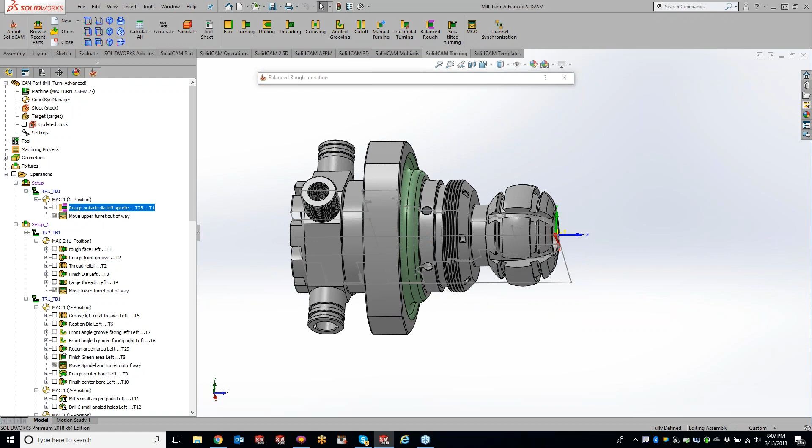So we started off with, let me get my part rotated around here, with our balance roughing. That's going to be your upper turret and our lower turret machining at the exact same time. The lower turret is going to be going a little bit behind the upper turret. So if I just show you my geometry, all I did is chain my outer perimeter. I want to machine it up to where, let's call it, the cam lobes are. Let me fit this here for you, get this back up on top. So going all the way through, up to this cam lobe right here.

And we got our main tool as tool number 25, which is in the spindle. We got our slave tool, which is our lower turret. Level same as usual. Technology, like I said, we're going to be trailing 5 millimeters behind and just doing a roughing strategy, leaving 0.15 millimeters on there.

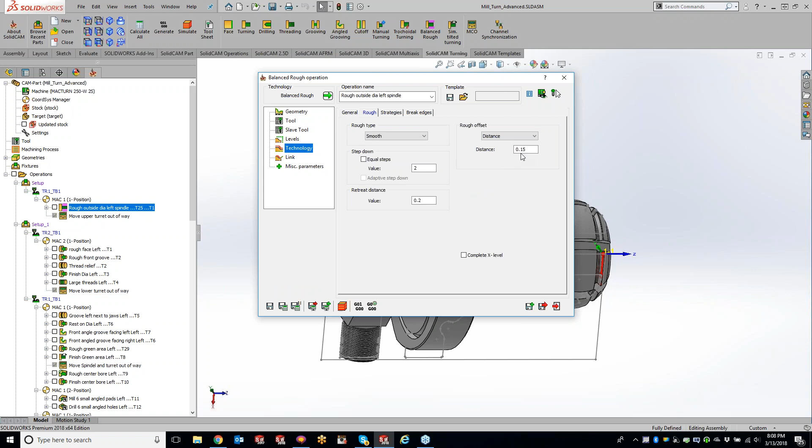So let's just do a simulate real quick. And we'll do a turning. Get this part kind of zoomed up for you guys.

Kev, just real simple to pick stock too. I'm thinking you started with a round piece of stock. Yep, absolutely, I kind of skipped over that part. Great point there, Steve. So we just started off with a simple round stock for starting off this part. Pulled off a bar of round stock that's a little bit larger than what we have. We can kind of see our round stock. And like I've said before, your blue area right here is your stock, and your orange is your actual SolidWorks model itself.

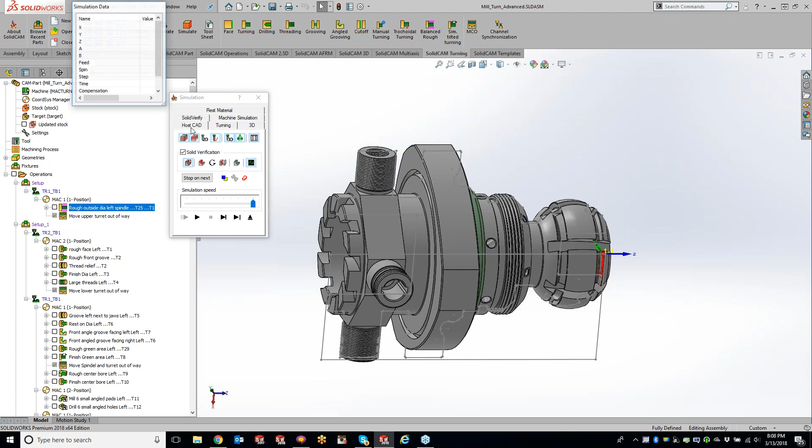Now, if we go into HostCAD, we can kind of see it too if we do the SolidVerify. And we can also go over to SolidVerify, and we're going to see the exact same thing. So this stock was defined kind of like what I've gone through in the past with the stock over here.

Okay, so now, and I'm really sorry guys, I don't have a machine setup or a machine sim for this particular part here. I would love to show it, but I was trying to get Florent to pass it over, but didn't have one quite ready for us.

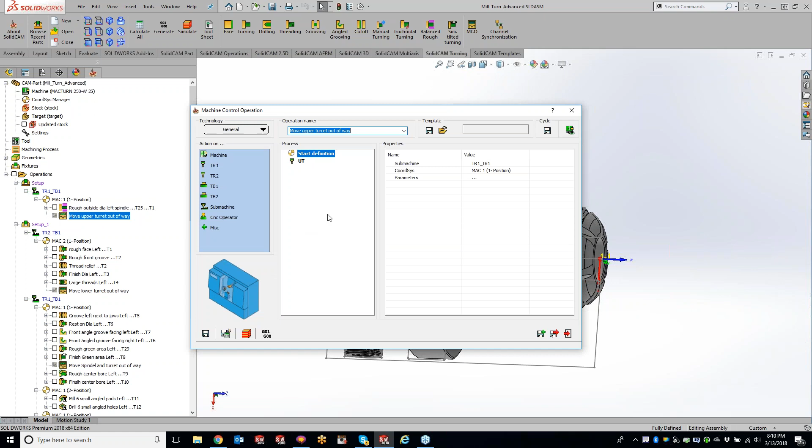So what we're actually doing here now is we're going to move the upper turret out of the way. We talked about this last week using the MCO. So what's happening is I want to move that upper turret out of the way so I can come in here and start roughing off using my lower turret. If I don't tell it to, for this specific machine, to go to the home position, that tool is just going to kind of hang down here, and I don't want that tool sitting in the way. So what the post team did is create a upper turret movement.

So if I click on upper turret, I'm telling it to move, and it's going to move out of the way for us. Like I said, if you guys do need something like this, don't feel like you have to create this yourself. There's a lot in the MCO, and that's why I didn't cover it, just because it's really based off of the post processor more than anything.

Contact your post guy that's been working on your post, or for those of you here in the US who don't know who your post guy is, contact Eric Middleby, and he will get you pointed in the correct direction to get that MCO set up. So don't feel like you have to create that on your own. We're here to hold your hand along the way for that portion of it.

All right, so what I'm going to do is rough off my face here. Now, as you guys will see, I went through and renamed all this stuff. So some of this may not make a whole lot of sense to you, but now when I come back through it, it's easy for me to understand.

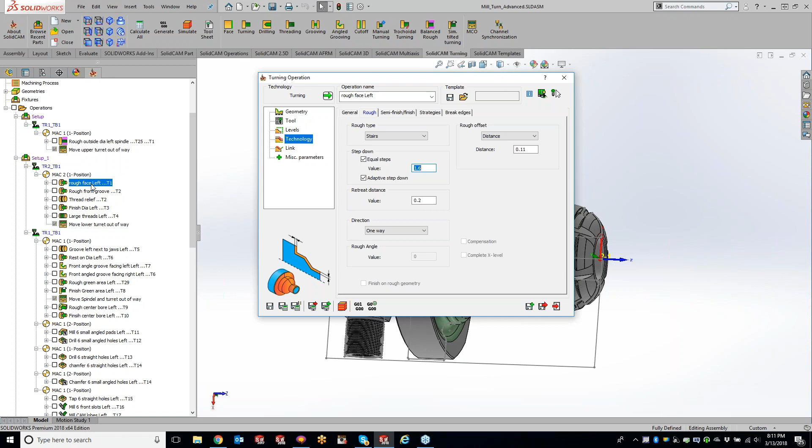So what I'm doing here is roughing the face using the left spindle. This is something that I kind of always overlook, and it does come up every once in a while. And granted, we can come in here and hit the checkbox and kind of see what's going on. But to be able to graze through this stuff without having to turn on all your tool paths is a little bit cumbersome.

So if you guys do put this naming convention in here, it will definitely help you out. You can do that by just hitting F2. If you click on the operation, F2, it will rename it and you can type it in there, or in the actual operation itself you can name it right up here. As soon as you hit save and calculate, it will update for you guys.

Okay, I'm rambling on here. No, it's a really good best practice, Kevin, you know. Yeah.

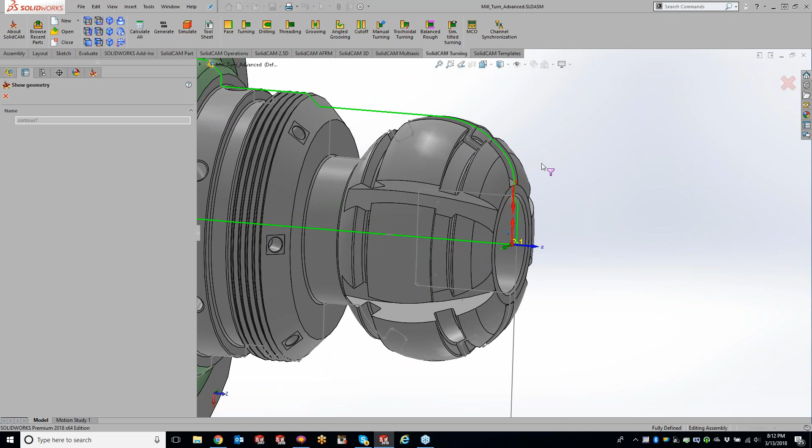Okay, so now I just want to face off, kind of rough it out. So if I come in here, I just grab that tiny smallest little line right there, and I did the auto extend to stock using my lower turret here. Got my tool set up.

Technologies, just doing a roughing strategy, leaving 0.11 millimeters on there and not doing any finish pass. So if we go ahead and simulate this here.

And like I've said before, when you guys are doing turning, try to stay with the turning one here. I find it the easiest to use, and you can really see what's going on, especially since we have our stock showing there for you guys.

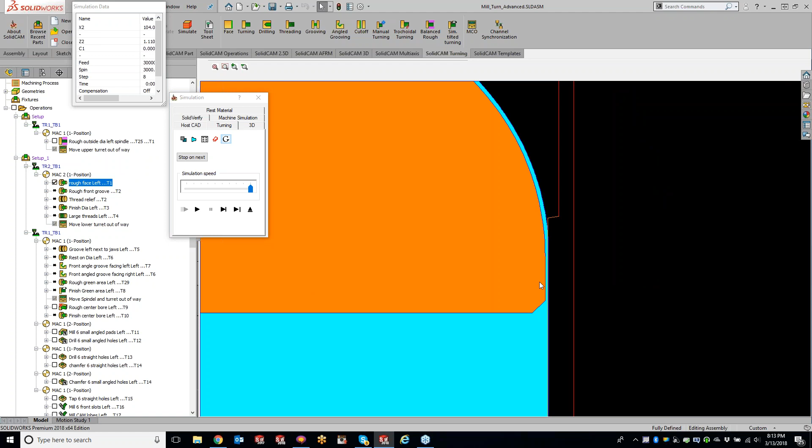Okay, so you can see, roughed it out. If I zoom in really far here, you can still see I have a little bit of material still on there. So I'm just kind of facing off the end of that part as a roughing strategy.

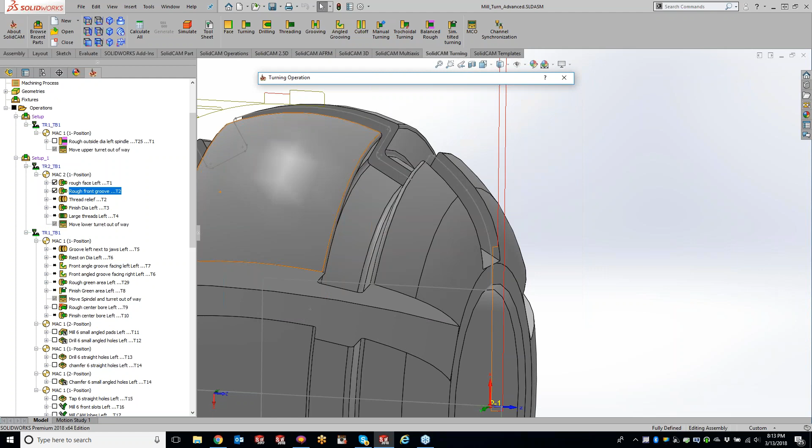Okay, so this one I'm going to rough out the front groove, and as soon as I calculate here, right here I want to groove out this, chunk it out, and just rough it out, and then I'll come back with a finishing tool here.

So if I show you the geometry, you can kind of see the purple line right there, just coming in there and roughing this strategy out here. And like I've talked before, the green line that you guys are currently seeing is our updated stock. That's why when I change something up here with my rough face, a couple operations that are affected by that got out of sync.

That's only because something changed, and that updated stock just needs to be updated. You guys can have this set up to be automatically done, so you wouldn't even see it. It would automatically do it. I like to see kind of what things change.

Like I said, the machinists, we like our control. On the fly, right, Kevin?

Yep, absolutely. So we're just doing a standard roughing operation right here, leaving 0.12 millimeters on there. Like I said, no finishing. Let's go ahead and take a peek here.

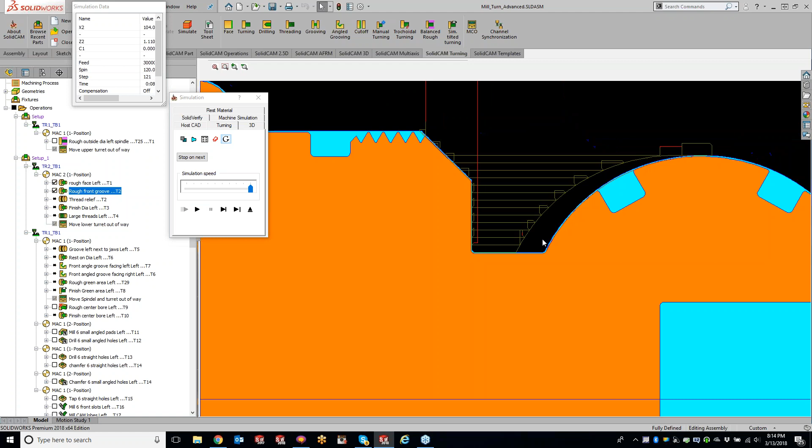Zoomed in, doing a zigzag pattern, and we've still got material. So if I zoom in, we'll be able to see we still have material going all the way around for us. And so what we'll do is come back with a finishing insert and clean up the entire thing.

Let me just calculate all these so we're not out of sync here. Calculate real quick.

And then, Kevin, how do you decide when you go to a grooving tool versus using descending motion? Is there any kind of thought process there? Anything deep, we can really hog out a lot with a grooving tool. Putting that straight down pressure in the x-axis, we can really get a lot of material removed out of there really quick. Okay. It's kind of like drilling versus using an end mill. Drilling is always faster to get material versus using an end mill with circular interpolation.

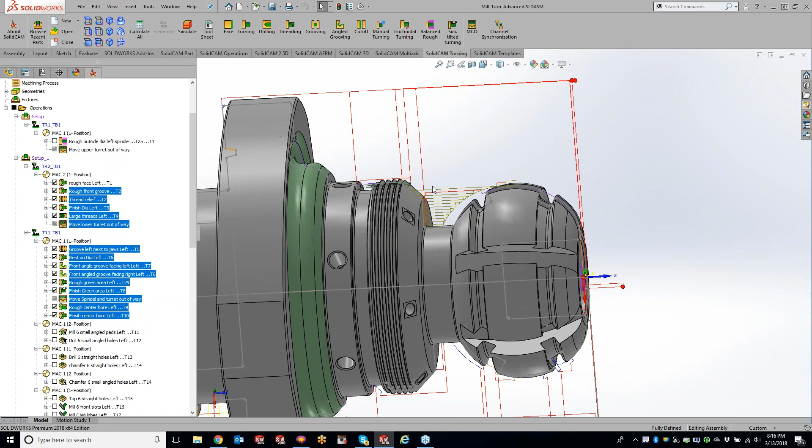Kind of the same strategy here. So I just want to get that bulk of the material out of there, anytime you're going deeper or have a lot of material. Gotcha. Exactly. All right. So, kind of a little off subject here, but after doing that calculation, I have it set up in my settings so it automatically shows the toolpath. Instead of going through and having to uncheck all these, if you just click the operation checkbox right here, they'll all automatically uncheck for you.

Okay. So now we're going to be doing the relief cut after the threads, which is that surface right there. This thread relief that I have set up here is just doing a simple single line going down. Go to our tool, and basically this is getting the rest material out of there. So we got our grooving tool again, same tool we used in the previous operation. Technology, here's the mode I want to go to, tool side right, just doing a single step down, and I can't remember, nope, I am finishing this one off.

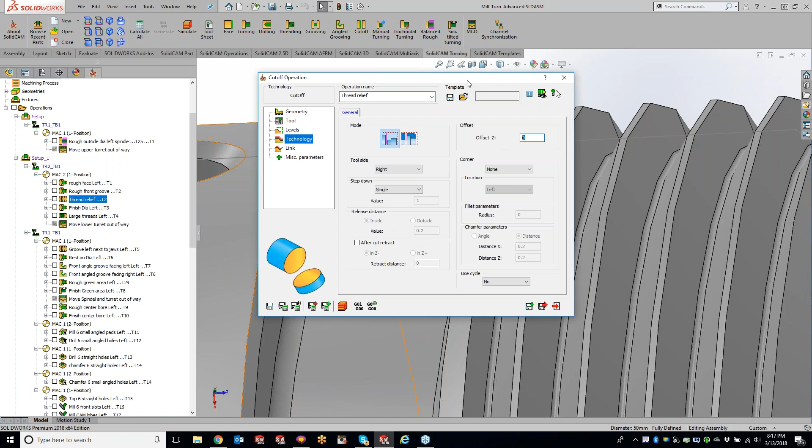So I don't have anything put in my offset. So when I come back with that finishing tool, this will already be finished off. So if we just do a simulate real quick. And I apologize if I feel like I'm rushing through this. Oh, no, I'm sorry, we're just cleaning up that backside is what's going on there. The way our finishing tool is angled, it won't be able to hit that wall, and I'll show you that here. Like I said, I apologize for going through this a little fast, but there's a lot in here.

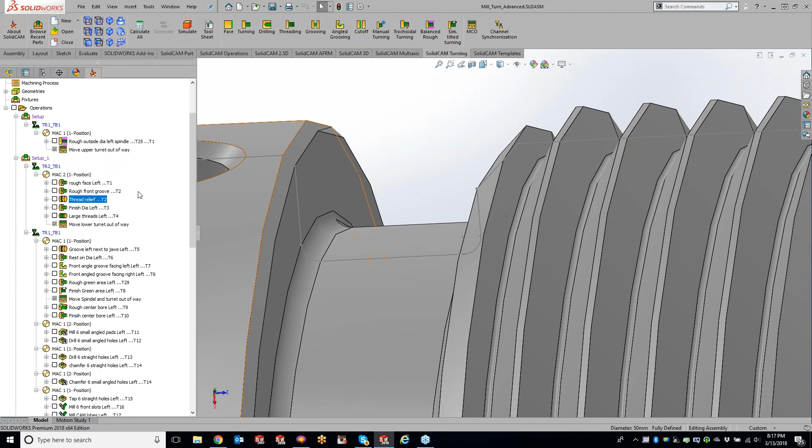Okay, so let's finish the outside diameter. I'm just going to do a show here, and we're coming in here with our purple line. This one actually has, we did point to point on a lot of this. So you can see my purple line goes straight across here, and we're going to skip over that valley right there. Another way of skipping over that valley is using the non-descending motion in the strategy. So we could turn that on too, so we won't have to worry about it. But since we were drawing in geometry, doing point to point to skip this undercut right here, I figured I'd just keep going along with the point to point.

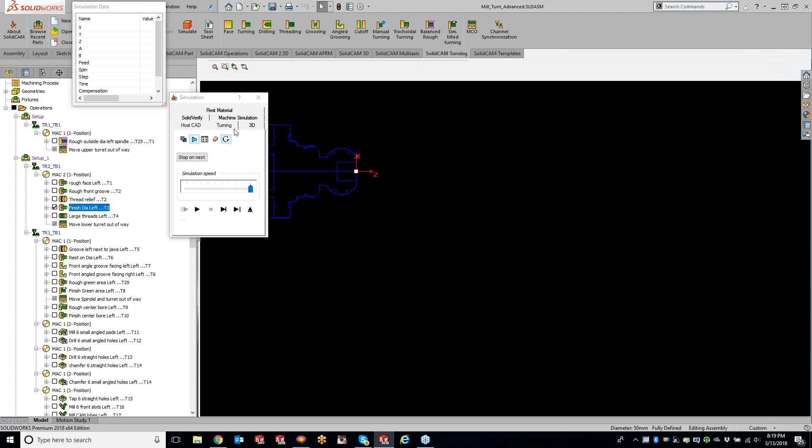Okay, so this one, we should be roughing and finishing. We are doing finishing only on this specific strategy here, and just doing a simple ISO turn. And I shouldn't have saved and calculated because it was already calculated. All good. Hey, Kev, would this be a fair statement too? You kind of eyeball the part and try to keep the tool, like that grooving tool. If you had multiple grooves, you'd want to pick those grooves rather than bouncing between tools, right?

Yep, it's all off of preference. Preferably, I would say try to stick with tools as long as you can. That way you're not getting that wasted time of tool change. For those of you doing prototype work, it really doesn't matter because cycle time isn't as critical as in a high production machine shop. Gotcha. And you do have the option to sort these tools by tool number too. You can right click on here and do sort by tool numbers. It groups all your tool number 2s together, all your tool number 3s together, and so on.

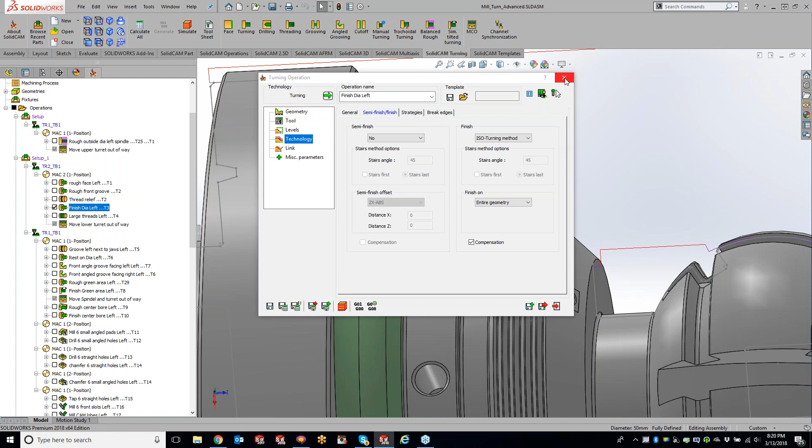Just remember, after you do that, make sure you do a SolidVerify to make sure that tool isn't doing something where a previous tool needed to rough it out and that tool is coming to finish it. So, perfect. Okay, so we got the outside diameter cleaned up now. Let's go ahead and thread our large threads right here. If I do a modify geometry, just grabbing that straight line and going a little bit farther past here. And grab my threading insert here. And we are doing, I should have looked this up, 1.5, give me one second here. What is that? Just trying to find it.

I think this is an M16. No. Sorry, guys, I'm trying to find it for you. M10 by 1.5, I think. I can't remember offhand. But so we're doing a metric thread. So we got our major diameter, minor diameter, our threads per inch. Not going to do a finishing pass, using the threading cycle that's in the machine here, stepping down with multiple step downs of 0.3 millimeters and a minimum step down of 10.

So, sorry, I had to get a drink there.

What that means is the max that we are going to go is that 0.3 millimeter step down. But if you take that 0.3 millimeters and let's say it can't fit within the range because you're taking 3 0.3 millimeter step downs, but you have an additional 15 left over, that's where this minimum comes in, and it's going to automatically insert that extra 10 thou step in there to finish off those threads for you.

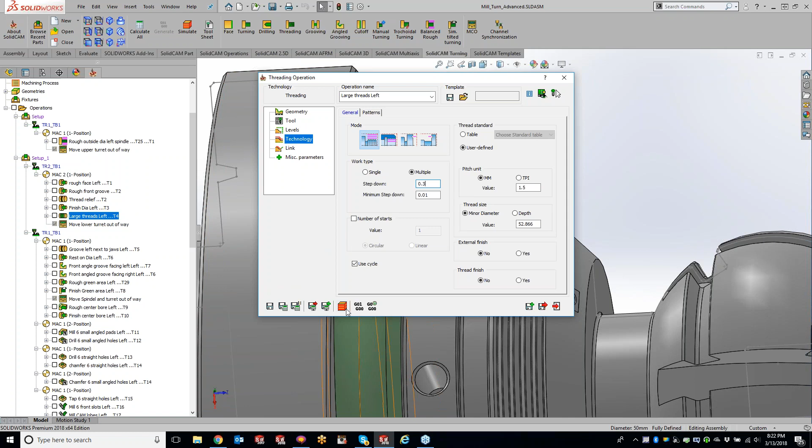Okay, so let's take a peek at what we got here. And we got our threads in there. We got a little bit of material still right here, so we'll come back and get that finished out here. The threading insert is just a hair off of our model here, so that's why I was just showing just a hair off, but we got nice clean threads. And as long as everything's good here, we are golden.

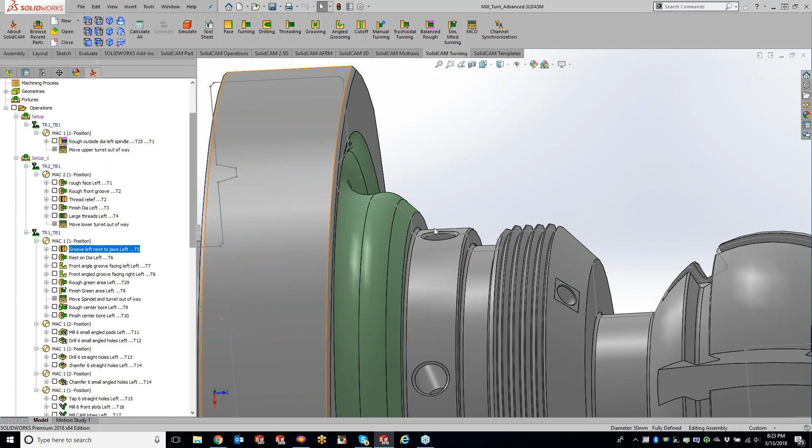Okay, so now what I'm going to do is move my lower turret out of the way, which is going on right here. And this is just a simple M-code telling the turret to move out of the way. Now, what I'm going to be doing here, let me minimize this for a second, is I'm going to be grooving out this area right here. So just coming in there, chunking out that material like Steve was talking about earlier here.

So geometry. Just got this U shape. I'm going to zoom in here for you guys. I'm getting that material out using that grooving tool. Levels, we're going to be doing long external. Doing a roughing strategy, leaving that 0.15 millimeters, and doing a finishing pass, keeping that tool down only. So it's going to try to keep that tool down as much as possible. So it's going to play this.

And like I said, this is pretty much the same thing as what we've been kind of going over for the last few weeks here. So a lot of this should be repeat for a lot of you guys. Hopefully I'm not boring you to death with this, but if you think about it, it's just a little bit of turning, a little bit of milling.

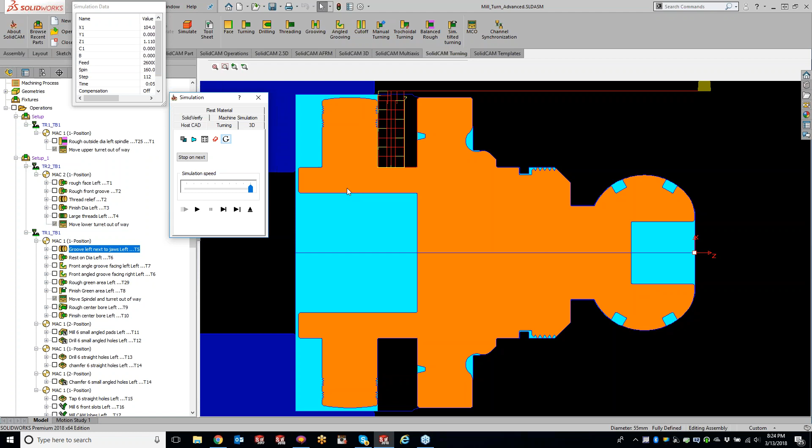Okay, so now I'm going to do the rest machining on that one. No, I didn't do a save and copy, just created a new operation, did rest material, and, sorry, let me get to the geometry here. Finishing off, get my part in here. These little areas where that finishing cutter couldn't get in.

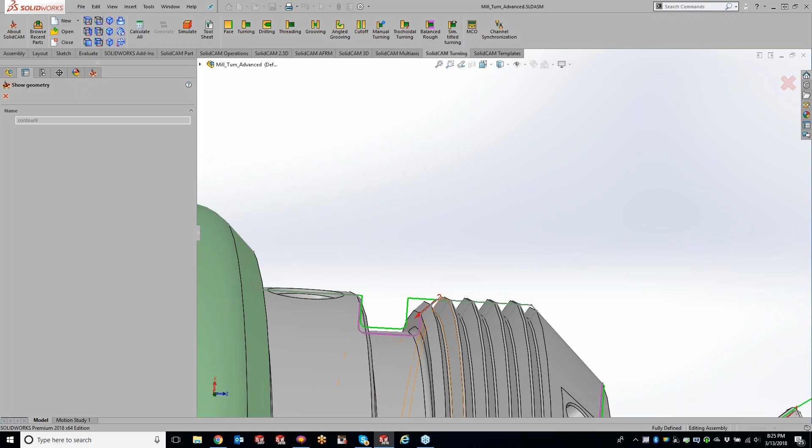So you can see, trying to get zoomed in here for you guys, we got a little bit of material that's still left down in here, and that's where our stock is currently, and we want to machine it down to here. So we're kind of doing a rest material to get that out of there.

Dang it, I forgot that save and calculate button. It's eating away at our precious time, Stevie. No doubt. All right, let's do turning.

And do we have Ronnie in here? Ronnie, I did hear back from development. Ronnie had a great idea. So as you guys are seeing, every time I come into turning, I have to click to zoom in that part. They got that new feature added in, so you guys don't have to constantly zoom in on that. It will stay where it was last positioned for you guys.

Okay, so we got a grooving tool, and like I said, just finishing off that material. So you can see now this entire area is finished out. Pretty much everything is the size except for our angle grooves here, a little bit of our undercut over here, and that's it except for the backside. All right. So now I'm going to do this groove right here.

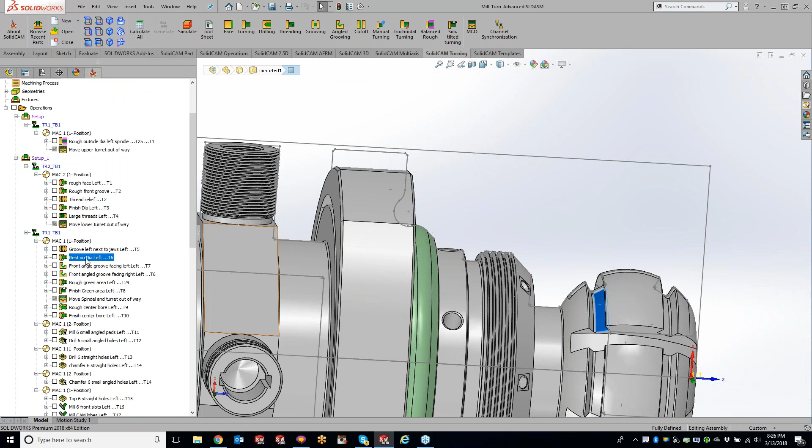All right, let's do a show. So just doing that little U shape right there. And we're actually using the angled groove operation for this one. Sorry, I forgot to tell you. So when I move that lower turret out of the way, we're switching back over to that upper turret now.

Using kind of that same grooving tool and doing an angle on the external, doing a roughing strategy, keeping that 0.07 millimeters on there, and doing an ISO turn method to finish it off. Simulate here, turning, coming in there with that angle groover.

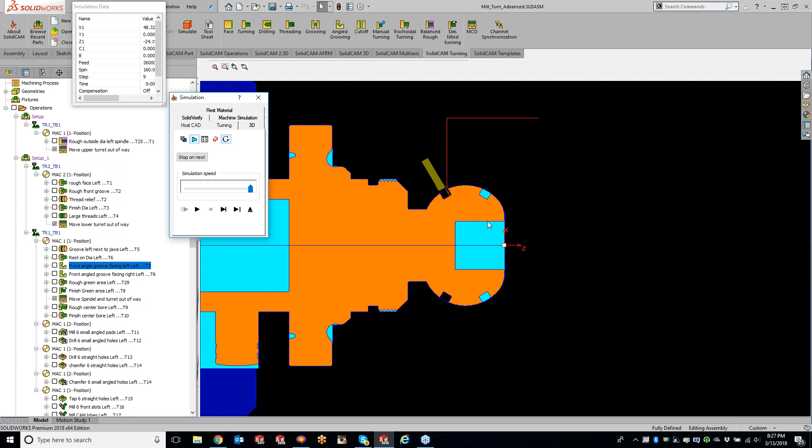And for those of you that haven't seen the rest of the night classes, you're not seeing the entire holder here. If you guys want to see that holder, this is an STL holder, and so to see it, we would have to go over to the SolidVerify side of things or the machine sim. And I'll pull up the SolidVerify real quick. Whoops, hitting the wrong button here. So now we can kind of see the entire holder coming in there at an angle and doing our groove. And we're done.

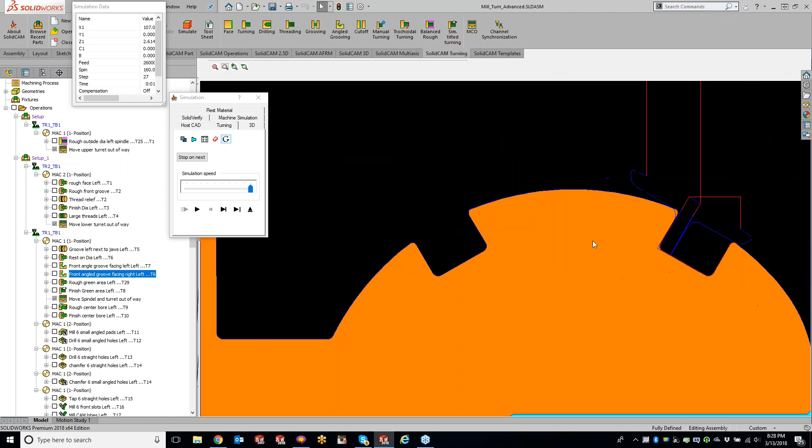So what I did on that one is just did a save and copy. And now we're going to be doing the front side. So if we go to geometry, show that same U shape right there, easy peasy. Everything else is the exact same. Go ahead and simulate this real quick. And we got that out of there. I did put a little bit of a chamfer lead in and lead out, and you can kind of see that round radius right here too for you.

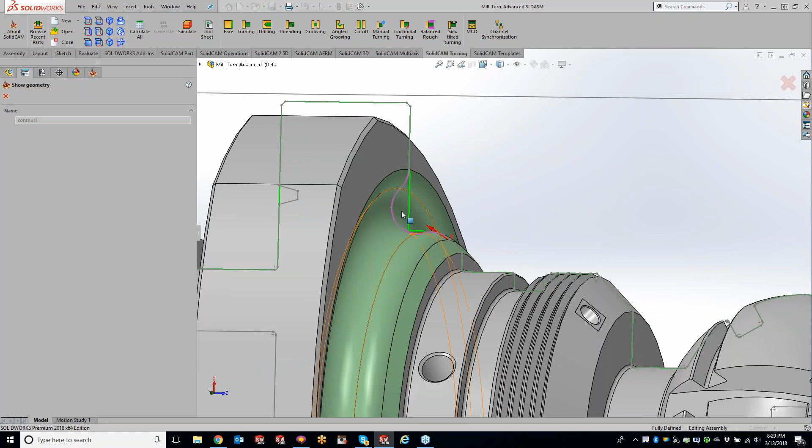Okay, so now let's start roughing out this undercut area right here. So just using a standard turning operation, I'll show you the geometry here. Coming in here and just grabbing this material right here. And like I said, you can see that green line. That's pretty much all we have left there. This is kind of like a button head, trying to get it in picture. Oh, dang. My space ball got a little fast on me here.

So kind of like a button head cutter or lollipop cutter, or I'm not sure what you call this, but a rounded insert grooving tool, I guess you could say too. Have it kicked off at 45 degrees as an additional angle. So technically it is set to straight down, you can see right here, but then we kicked it off to a 45-degree angle here. Technology, just doing a long external here. If we go to roughing strategy, taking a couple steps, leaving that 0.1 millimeters for a finish pass. You can see we don't have any of our finishing strategies turned on here.

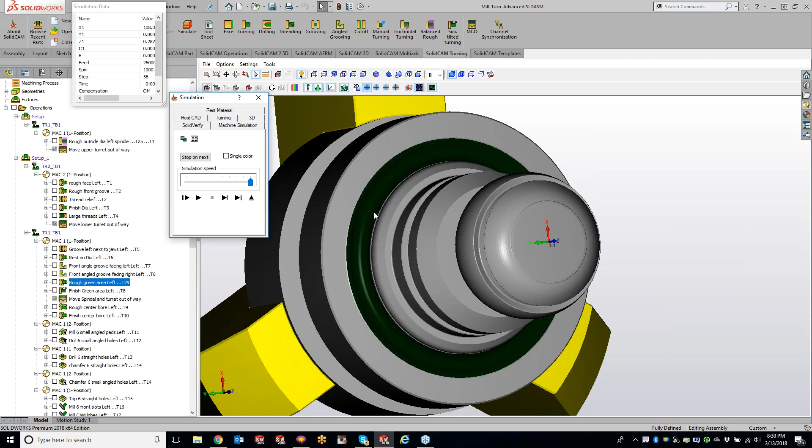And just kind of chiseling away at roughing that out. So not too concerned about how everything's looking. I just want to get the majority of that material out of there. If we do a SolidVerify, you can see a little bit better of what's going on. Play through. And pretty smooth for doing a roughing strategy, but you can still see we still have material there.

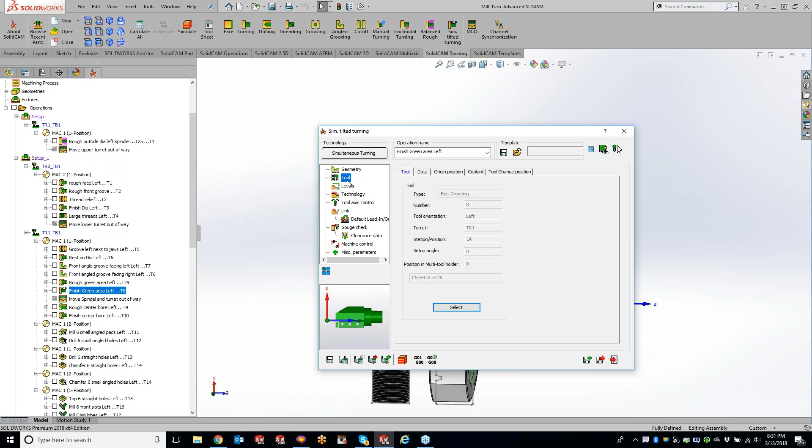All right. So now we're going to come in there and use a 5-axis, or well, I call it 5-axis, but simultaneous tilted turning. So we're using the same contour as what we did before, using just a little bit different of a tool coming at this. And so now we're coming in our clearance in the Z direction. We're working on tool side right. And tool axis control we're using through tilt lines and all lines weighted by distance.

So if I show you my tilt lines, you can see I got some temporary lines that were just drawn in here. And like I said, a little bit of repeat here, but the tilt lines are how you want that tool to move through that entire cut. Just using no lead in or lead out, no gouge check, and the rest of this we don't even touch. So let's take a peek and see what's going on here.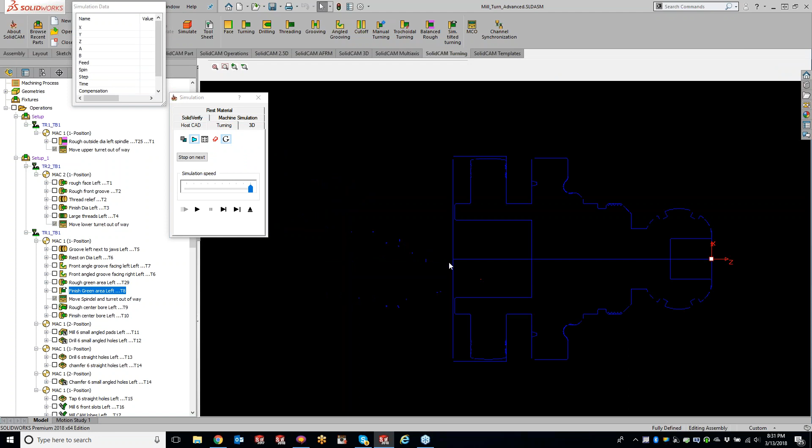I think after this class, Steve, I could get you to program this part for us. Hey, man, the machine's worth too much money for me to crash it, man.

No, you brought up another good point, though, Kevin. I've been involved in software for a long time, and one thing we want to stress is we love to hear feedback. We can't promise that if you make a feature request, it's going to be in the next release, but we love hearing from the user base about, hey, this would be really handy, because we're using the software all the time, but we're not in production all the time. So if you have ideas, please, please, please get them to us, and we'll analyze it and do our best to get it into the software.

So. Yeah, like Ronnie said, if it's good enough, it makes a difference. Oh, Ronnie, you're a keeper. That's good.

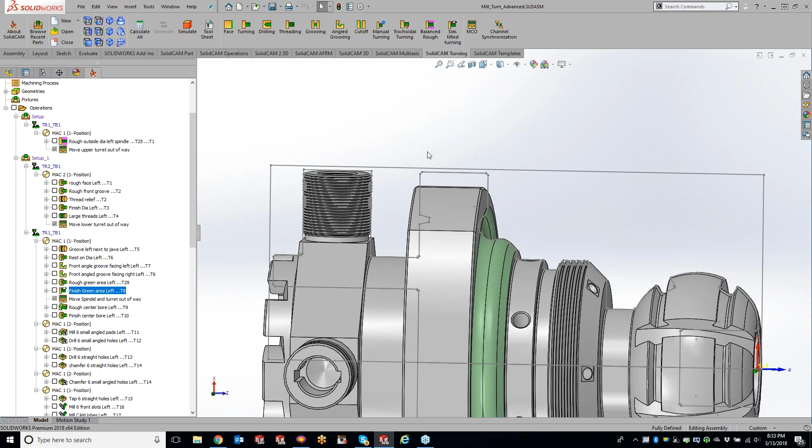Okay, so now what we're going to be working on is the center bore over here. I'm going to rotate this part around here. So we got our center bore that we're going to mill out. So I'm going to move that spindle and turret out of the way, and that's what this MCO is doing right here. And we're going to rough out the center.

Now, before I say anything, this one's not doing it, so I'm not going to even bother with it. Okay, so if I just show you the geometry here, just doing simple profile. That's all we're doing here. And I want to come in there with an end mill and do a circular interpolation. Like we talked about, drilling is faster, but it's got to look good too, right? So we're just using a 12 millimeter bull nose end mill here.

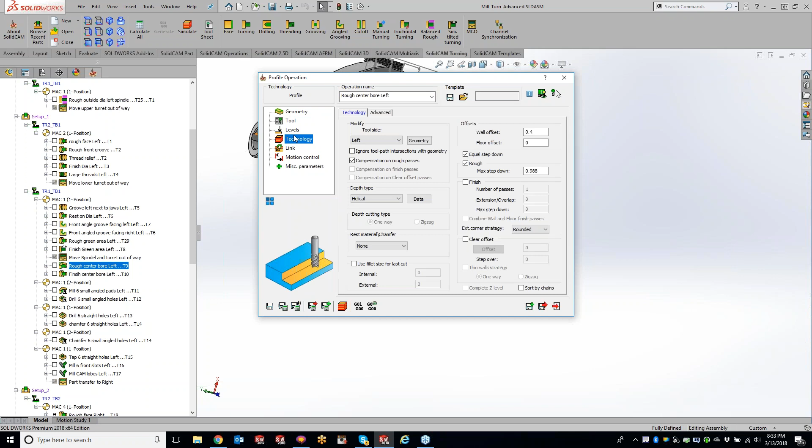Levels same as usual, but with this one we're going to do a helical entry, so it's going to do a nice corkscrew inside there, leaving 0.4 millimeters on there. And so when we use this helical feature, this is your step down. So for every 360 degrees that it makes it around this part right here, it's going to go down that 0.988 millimeters. So hopefully that makes sense for you guys. So let's see what that looks like.

So now we're going to kind of have to gear over to SolidVerify now that we're getting into the more milling portion of things. Okay, ooh, that was way too fast. Let me play this again, get rid of that holder. And so you can see it's doing a nice spiral, working its way down in there to rough out that.

Okay, so now we need to finish off that bore. So we're going to come in there with a boring bar and show you the geometry here. Just pick that one simple line in there. Boy, my space mouse must be just a little off tonight. Just picking that single line geometry right here. Using that boring bar and doing a long internal. And we can see we're doing an ISO turn, and we're not doing any roughing. So I just selected finish only because we already machined out the majority of that material in there.

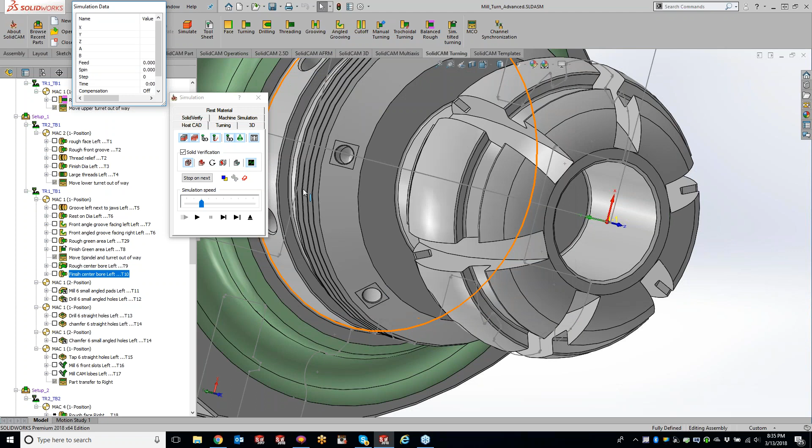So let's do a simulate. And since we're doing a turning, I'll do a turning simulation here. There we go. Finish pass complete.

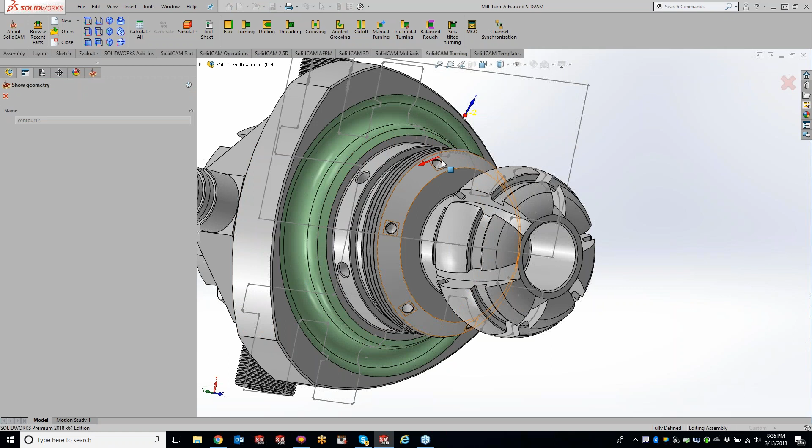Okay, so now we're going to get into a little bit more complex, but still extremely easy. So now what I'm going to do is mill off my pads, these 6 little flats right here. So I'll come in here. Do a show. And I'm just picking this single line right here, and since my tool side is going to be left, it's going to follow along there and swipe off the top of that surface for us.

So we're using a 4mm end mill here on the upper turret. I got my level set up to go down to my depth. Technology, and like I said, we're going to stay to the left. If you guys are ever curious on where that tool is going to be, click that geometry button, and it will actually show you your tool in there.

So what we did here is extended it past by 3mm. Since I didn't have line geometry, I don't need to draw it in there. I can just add that extension in right here. And just that's enough to swipe off and get us a small little pad. Then what I did is did a transform around 4th axis 6 times or 5 times, and got us this.

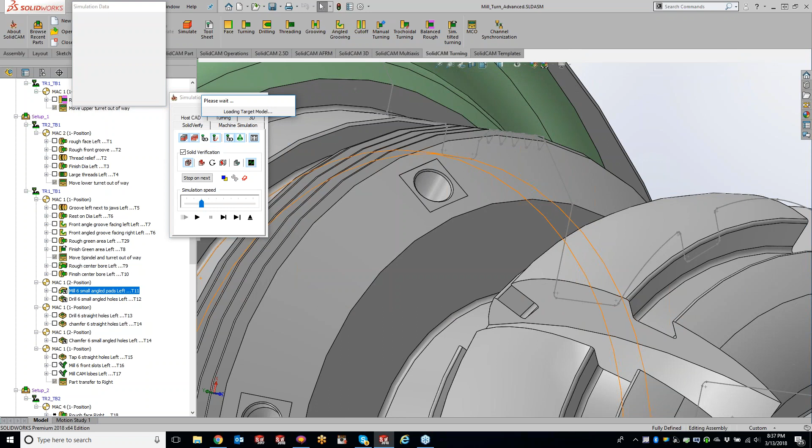So while this is loading up here, is this part looking a little bit easier, not so hard to tackle for you guys? Or does it still look like, oh my God, that's going to kill me? That's what I was going to say too, Kev. Man, it's software. Play around with it on the computer screen. You're not going to break anything on the computer screen.

Yep. And I'm still really proud of those little guides, instant help on the bottom corner of each dialog box. Oh, yeah. It's kind of giving you an indicator of what's going on. Exactly, yep. All right. Makes it better. What makes it better is the MCO. Yeah, the machine movements.

Okay. So now we're going to drill those small angled holes. So in here, just doing a simple drilling in your milling side right here. So grab my geometry, and we can go about this 2 different ways. I'm actually going to do this one as a transform. The next one we're going to do as the actual 4th axis. And for you guys that don't know what I'm talking about, if you hit this arrow down, you have the option to do around 4th axis. So we'll do one one way, another one another way, and you can see what you like better.

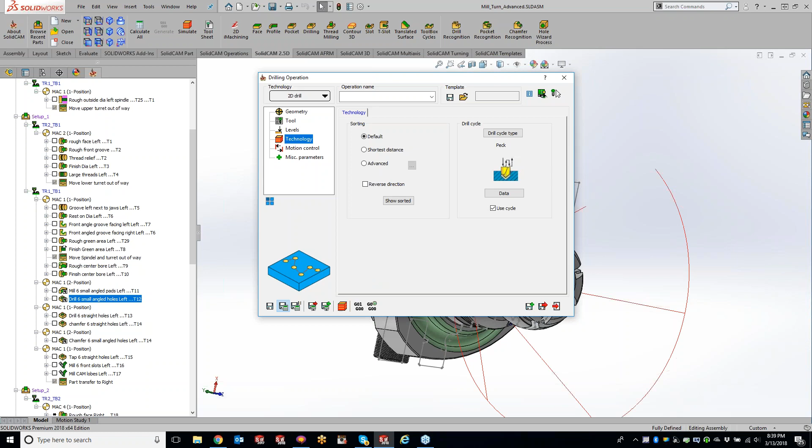So we're going to be drilling these pads for these holes. So I got my tool set up for my 3mm hole, levels, everything set up here to cut off the tip. Technology set up. I don't know why it's set to tapping. Let's do pecking here. And so now we got our peck drilling, and let's take a peek. So do a SolidVerify here. And I'm going to slow this one down because I know this one goes fast. So drill, drill, drill.

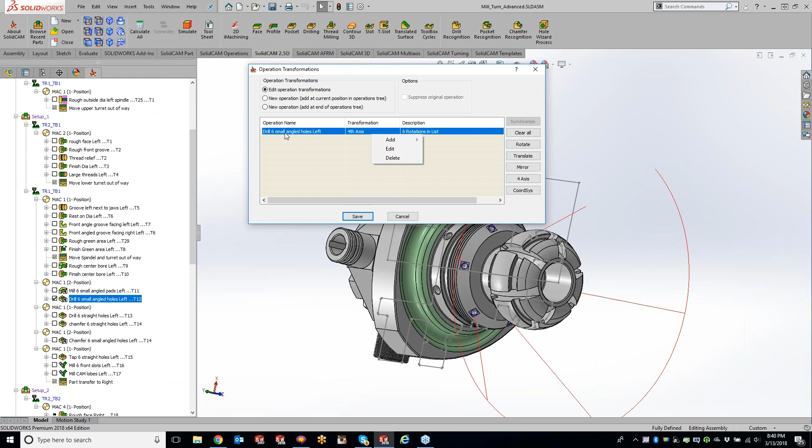And I forgot to add, I did do a 4th axis transform on this also. So if we look in here, you can see we did the 6 holes on a 4-axis transform. So I only had to pick just the one geometry. So if I do a show, let me turn off that tool path for you guys here. You can see all I did is just pick one drill point inside that hole. And that's lined up with my Mac 1 position 2 angle right here.

Okay, so now another way of going about drilling those holes around the 4th axis is right here. And like I said, this one was picked around 4th axis, so I don't need to worry about a transform. But I do have to click on all my holes. So you can see right here, I had to go through and click on the holes, or come over to my feature tree and just click the holes. Now make sure your arrows are going out, or it's going to think we want to drill from the bottom and work its way up. So make sure those arrows are pointing out in the correct direction.

Okay, we got our 4.25 millimeter hole, drilling it that deep, and let me switch it over just to drilling here.

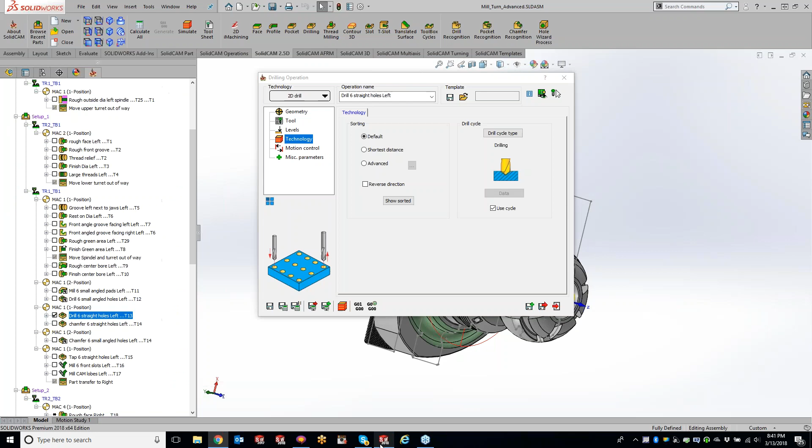All right, let's play this one through and do solid verify. Pretty much the same thing as what we just did before, just on a different position because we're using Mac 1, position 1, because those holes are straight up and down. And then this operation right here is basically doing the same thing except doing a chamfer. So it's just chamfering those holes.

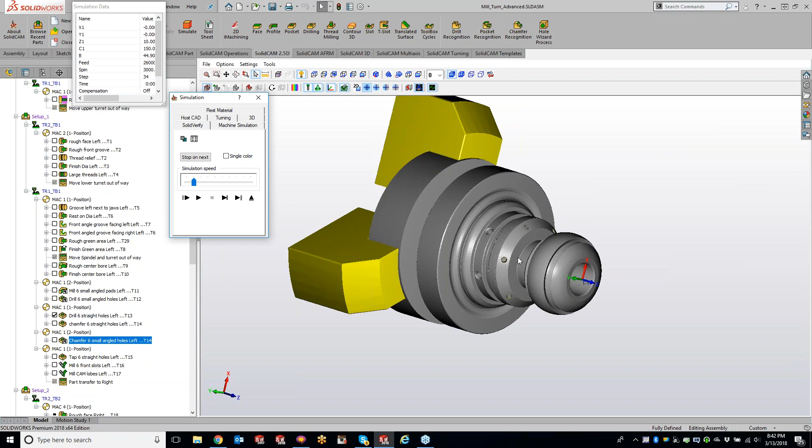And now, if I come to this one right here, just did another save and copy off of this operation up here, and dragged it down to here, and we're using that same chamfer tool, kind of like Steve and I were talking about, keeping those tools sorted together to do the chamfer on those little holes on that flat pad. So if I zoom in here, you can see the chamfer on those flat pads.

Okay, so now, oh, we've got to tap those holes. Forgot. So another save and copy from up here, clicked and dragged it down. I'll just show you guys the toolpath because we're getting a little tight on time here. So just coming in there and tapping those holes out, going around there.

And now, let's see, chamfer 6 straight. Oh no, we're right here. Okay, so now we're going to be milling out our slots. This one we're actually going to be using the simultaneous.

Ben, you wrote SP3 HF3. Did I say that wrong? No, SP2 HF3, sorry. Okay, so we're going to do SP2. Yeah, it is SP2, Ben. Hopefully I'm not getting you guys confused here. So it's SolidCAM 2017 SP2 HF3. I saw SP. Okay, yep, you're good.

Okay, so this one, doing a 5-axis operation, and one, let's just open this up here.

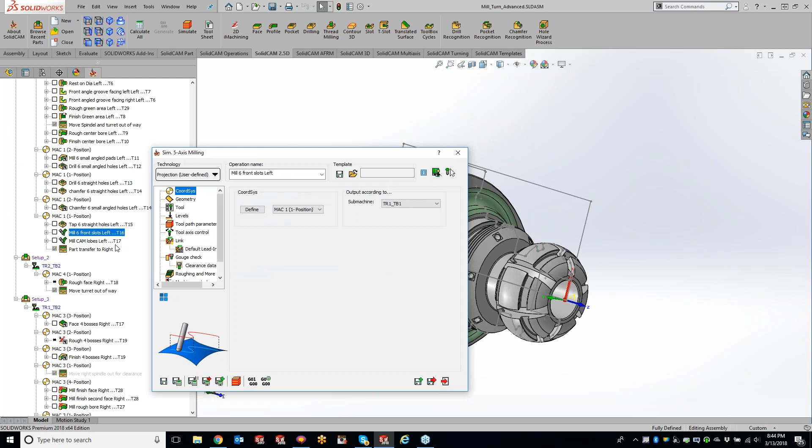All right, so we're doing projection on this one. Want to cut on this face right here. And now with the 5-axis, we have the ability to do the transform right here under the rotate and roughing, using a 5 millimeter end mill and telling it not to be tilted, stay normal to surface. Nice and easy toolpath.

Let's do a simulate here, solid verify. And get rid of that holder so you guys can see a little better.

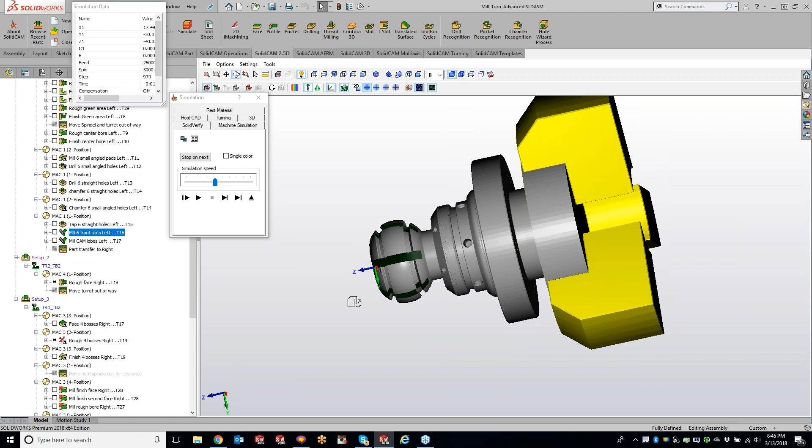And now we have our grooves in there. Like I said, we only had to program the one, so we just get the toolpath looking good on the one, and then bring it over, and we can transform it over for you guys.

Okay, so we roughed and finished those, and now what we're going to do is rough and finish off our cam lobes. This one also has to be a 5-axis because we're rotating the spindle, having that live tooling come up and around. So hopefully that makes sense.

Let me just simulate and I'll show you here. Oh sorry, I got to show you the operation first. And this one we're also doing a transform on.

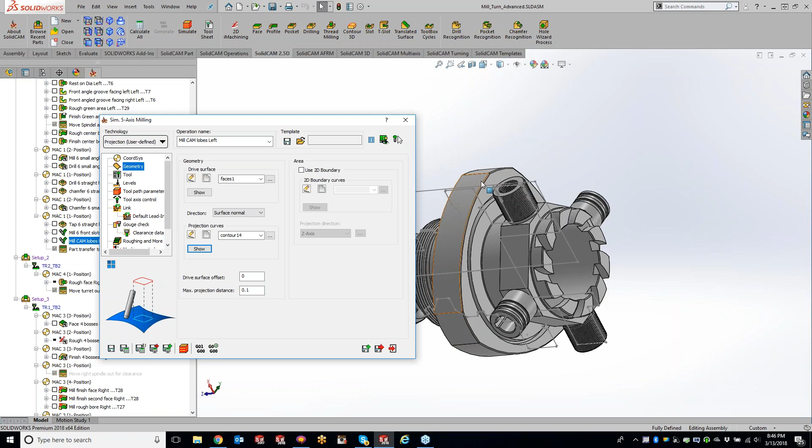Geometry, show. So we have this cam lobe face right here, and projection curve, just a simple sketch right in the center for you guys. Basically what we're doing here is I'm telling it to face mill off that and stay right in center. That helps out for you guys in simple terms. That's basically what's going on there.

Using a taper end mill, kind of like a face mill right here. And we're going to stay tilted relative to cutting direction, keeping the lead and lag angle and side tilt angle at 0 degrees. So let's see what this looks like.

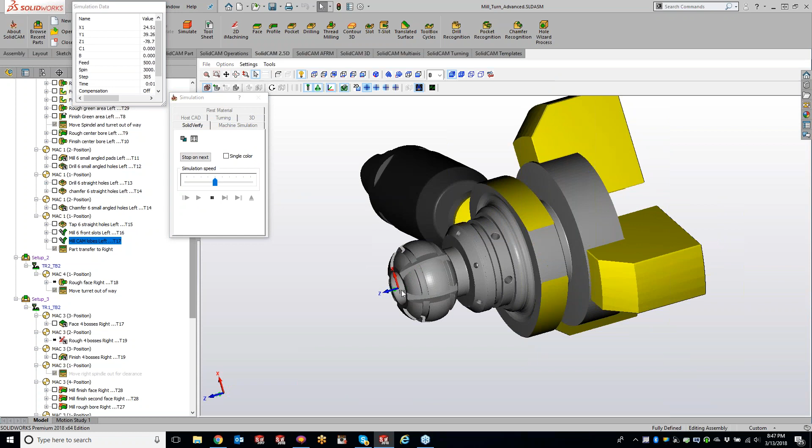All right, so play this through. Just going around and working it right down to the face, doing multiple step downs. And the multiple step downs are right here in your roughing and more under the depth cuts. So we're telling it to take it in 2 cuts with a spacing of 3 millimeters.

Okay, so now we're going to transfer the part over to the right spindle. That's exactly what's going on right here. Turret's coming out, it's going to move the part out, it's going to close on the stock and clamp it. So now we are working on the right spindle.

And I got a couple out of sync here. Whoops. Fat fingers here. Oh boy, I got to get working on this. We'll keep this right up, Stevie. We're going to be here till midnight. Yeah, I'm telling you.

No, I'm just curious what that part does, Kevin. That part, I don't know. Florin actually made this part and tried to show every aspect of a mill turn machine as possible. Yeah, and there's one missing thing in here, and if I don't show it, Ronnie's going to come through the phone and strangle me. So at the end, I'll show that little feature. Yeah, that's a serious part. A little bit of every feature possible almost.

Okay, so now I'm going to kind of breeze through this. So I'm not going to show you the geometry, I'll show you the simulation here. So now, whoops.

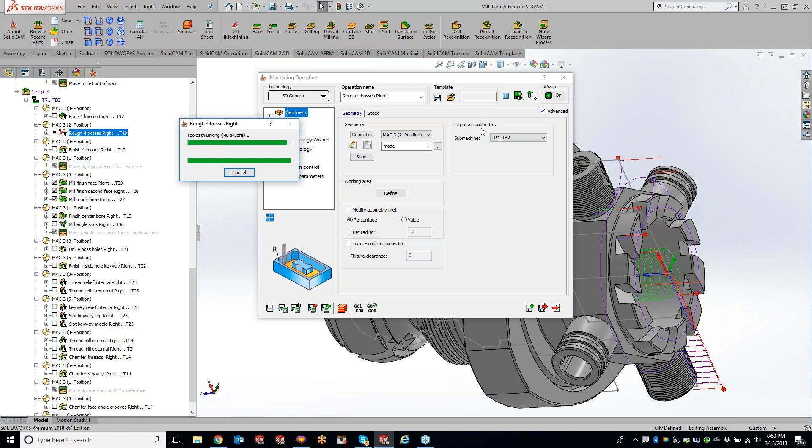Maybe it might be a little better if we upgraded your 386 computer too, Kevin, I suppose. Yeah, I know.

I'm just kidding. All right, let's do a SolidVerify here.

Okay, so you can see we've transferred it over now, and it came through on this actual operation right here and just faced off the 4 tips. Basically all it did is just a center line only and then did a transform around 4 times. Now we're going to utilize the 3D iMachining, and what I did here is the exact same thing, did a transform. So let that iMachining work its magic and get that roughed out as much as possible for you guys, because getting that material out is going to help you when we come to the finishing side of things.

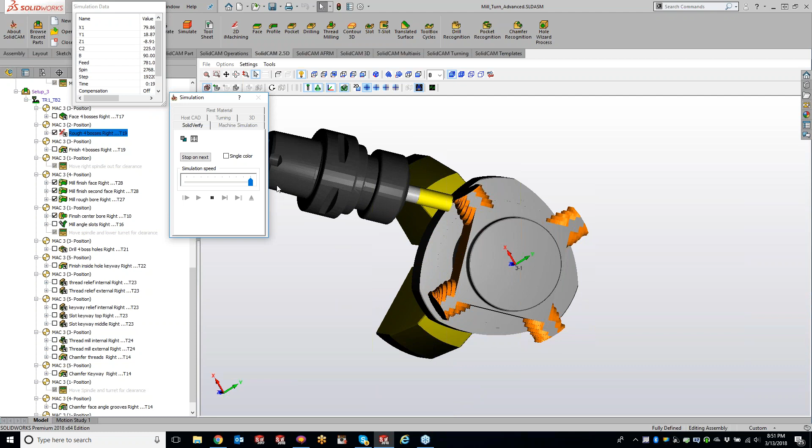All right, so now we have everything nice and roughed out. Obviously we need to come back and finish it. So this operation right here is we're going to finish off those bosses, just doing a simple clean profile cut, selecting that bottom geometry, and just doing one finish pass, doing a transform again around the fourth axis. So now we're going to move the right spindle out of the way to start working

with the lower turret. So we're going to do a finish off on the face here, getting that up to size. Then we have a secondary face in here, which is this back face up here, getting that right up to size also.

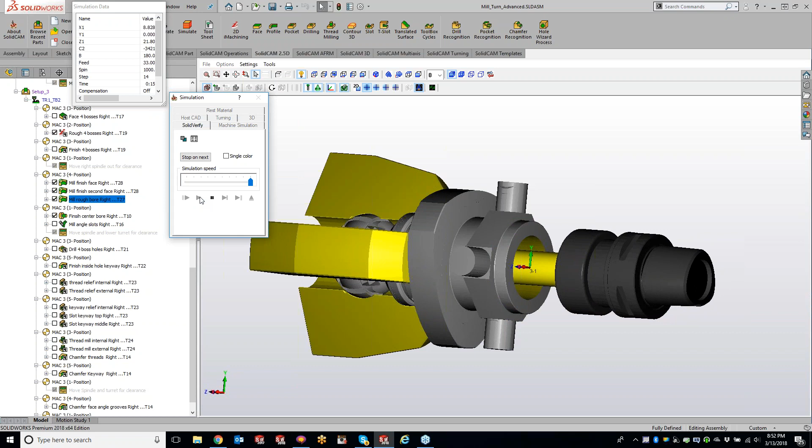And start the center bore using that same circular interpolation using profile, and coming back with the boring bar. So we got that finished up to size now.

Now we're going to work on those angle slots. And for those of you guys that don't remember, let me just do a stock target. Here's our angled slots that are going in there. So that's basically what's going on there.

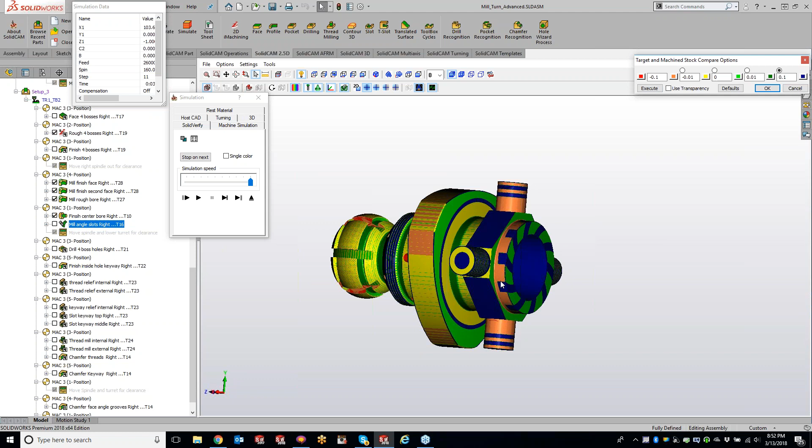Using the 5-axis operation and using that transform. 5-axis can be a little intimidating too, especially on something like this, but just work on the one. Once you have the one done, then we can transform it around multiple different times. So don't try to kill yourself and get all these done in one single operation.

All right, so now we're going to move the lower turret out of the way for clearance, and I'm going to drill out those bosses now. That's a simple drilling operation, just did a 4-axis transform. And now I'm going to finish off the inside of those holes.

Finish keyway right, what am I missing here? Oh, it's finishing off the two, I'm sorry. So these ones that have a keyway going through there, just getting those to the correct size.

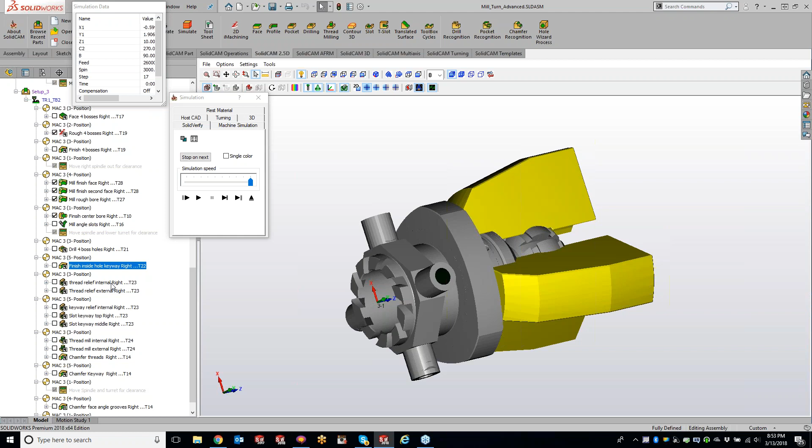Now we're going to do the internal threads using the thread milling operation. I think that's going a little fast, slow it down here. Oh, I'm sorry, that is the thread relief at the bottom. So if I go down there, we can see it cutting, just doing a thread relief at the very, very bottom there, and just pick the single line geometry at the bottom of that relief and doing a transform one time to do the bottom.

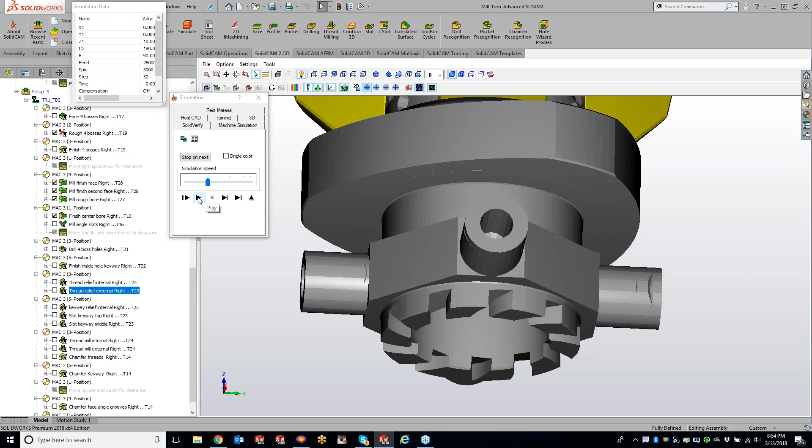So now we're going to use that same tool and do the thread relief for the outside. And now we're going to use that same tool again here and do where the keyway cutters are going, so right here and right here. And use that same tool again.

And you guys remember those, there were some slots, so we have one slot right here. Do save and copy and switch my levels up because I have one right underneath it. So there we go, we got the one right underneath there. We're good, and this boss should be done now.

The only thing we have left is the thread milling on these two, internal and external. So we'll do the internal threads first. And just do the one and do a transform, make life easier for you guys, that way you don't have to add an additional coordinate system in there also.

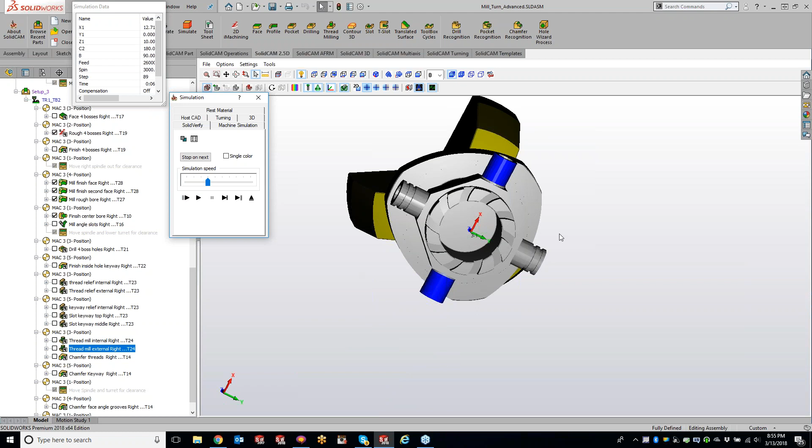External threads. Okay, it looks good, and I'm just kind of looking here to make sure. I think I would go a little bit deeper with my thread relief here so I can come back and change that for that thread mill. But okay, so using a spot drill and just kind of chamfering the threads, chamfering the other two bosses, inside and outside, just do the one and then transform it over.

Okay, now we're going to move the spindle out of the way for clearance. We're going to chamfer the grooves on these front faces right here.

So just doing a nice light chamfer on there, just using the one geometry, and we're actually doing a rotate on this one as a transform instead of fourth axis.

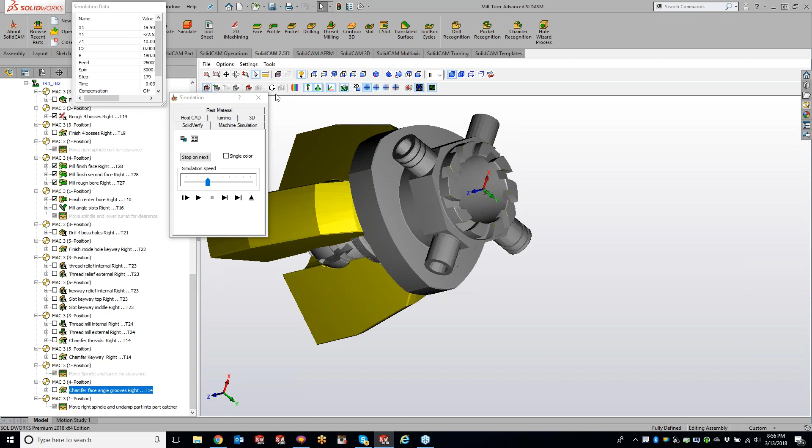Now what's going on here is, if I go down to here, we are moving the right spindle out, we're unclamping it, and the parts catcher is catching the part. Now let me turn off this toolpath here.

Ronnie, what am I forgetting to tell you about? I know a couple of the other guys were asking about it too. Yep, you got it, broaching. Okay, so we got our part with broaching right here.

So easy enough, what we're going to do here is look for, is this the one? So my MAC 3 position 5, yep, MAC 3 position 5 is what I want to do. So I'm just going to right click on this, do add milling operation here, and we are going to do a toolbox cycle.

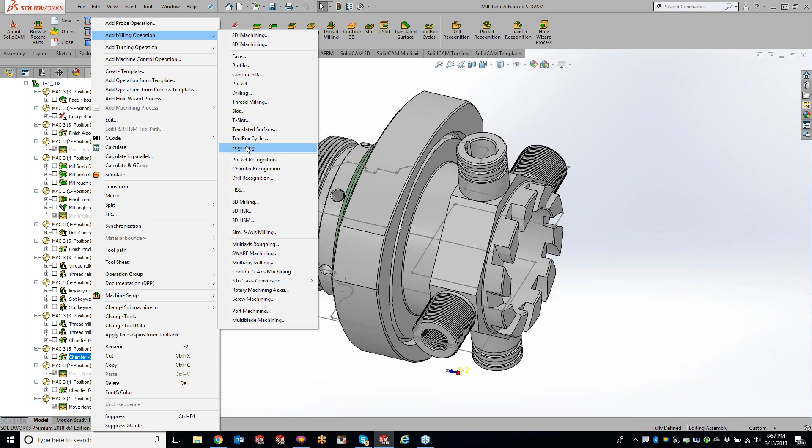So I was doing this part earlier and I couldn't figure out, I'll show you exactly what I was doing. I was coming in here, and what you want to pick is, man my space ball is just... you want to pick, if I can get to it, basically this line. So I'm grabbing, dang it, I had my auto constant turned on.

Let me delete that, yes, turn off my tangent propagation here. Zoom in here, got my single line, go to hit the green check mark, and I get this error. I'm like, man, what? Then I tried clicking on several other geometry, inside the toolbox cycle, I completely forgot it's set to spiral open slot.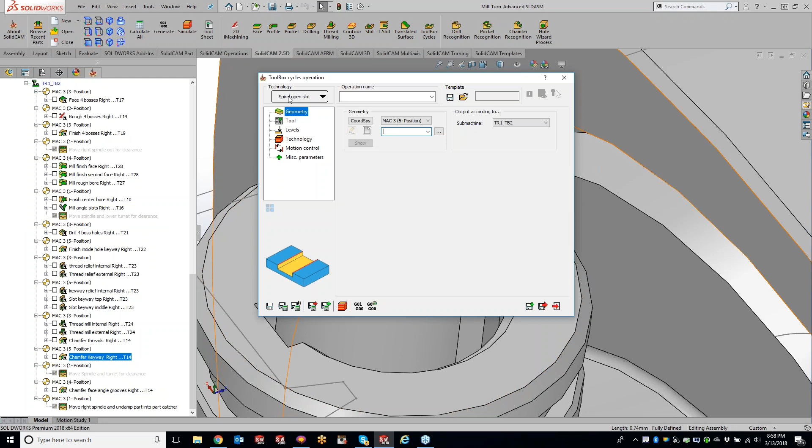Obviously that's not going to work for us, so we need to go over to the broaching. So we go ahead and click on broaching, now we can grab that geometry. Tangent propagation, turn that off here, and there we go.

Okay, so I set up a broach tool already, and as soon as it comes up here I just got to find it in my list. Oop, I forgot to do something, I need to switch to my lower turret here. Tool, select.

And here's my broach, so my slot width is 3 millimeter, as you can see down here, I got a 3 millimeter broach. Got everything kind of set up, hit the green check mark. That's funny, my broach is showing off center now, it was showing correct. All right, we can look at that later here.

Levels, let me set up how deep I need to go here. So I'm going to broach down to right there, and we'll just go a minus 0.1 millimeter past. Technology, we'll do right. And you know, if we want an extension out, or do we want to take it one cut, we're doing it in 1 millimeter step over right now. Let's just see what we got.

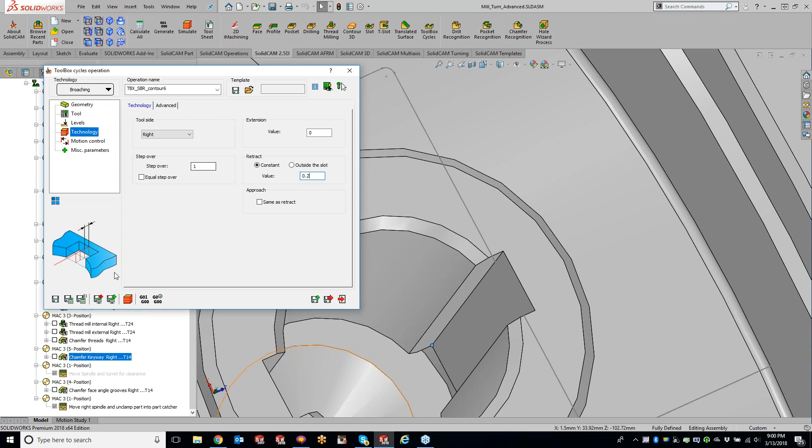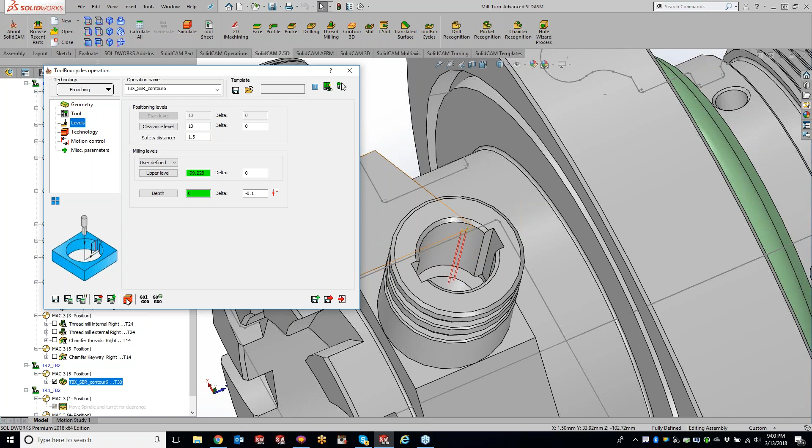And what am I missing here? My height levels, upper level, depth. There we go. Now go ahead and do a solid verify here.

I got my tool going the wrong way here. Could have sworn I had this broach all set up for you guys. What am I missing here? I see what I got going on.

Okay, so I was telling it to broach on this side, but if you guys look, my coordinate system is over here. I grabbed the wrong geometry. Come on Steve, you're supposed to catch that for me.

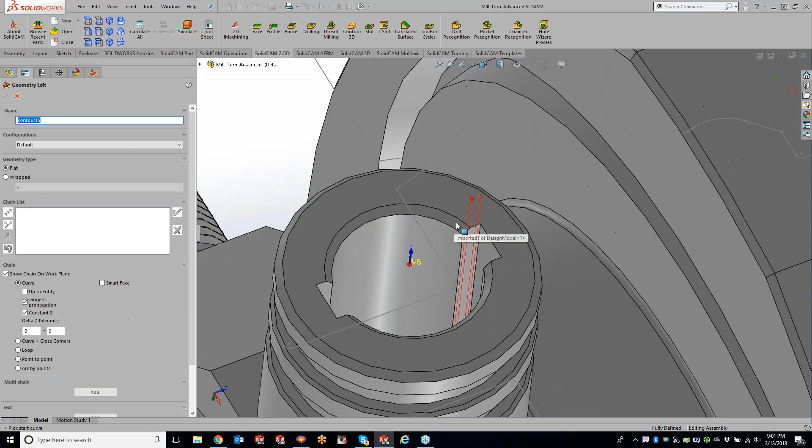Yes, the sales guy kind of missed on that one, Kevin. Hey, I'm just happy you finally got a smartphone. I'm telling you what, I'm probably learning more than the rest of the class, actually. All right, so I gotta go. I like that about the software too, it will warn you if you're doing something wrong. Yep, give you a little warning, absolutely. That is for sure.

Okay, now there, that's looking a little better. All right, so let's do a solid verify here. And we're coming in there and broaching that out.

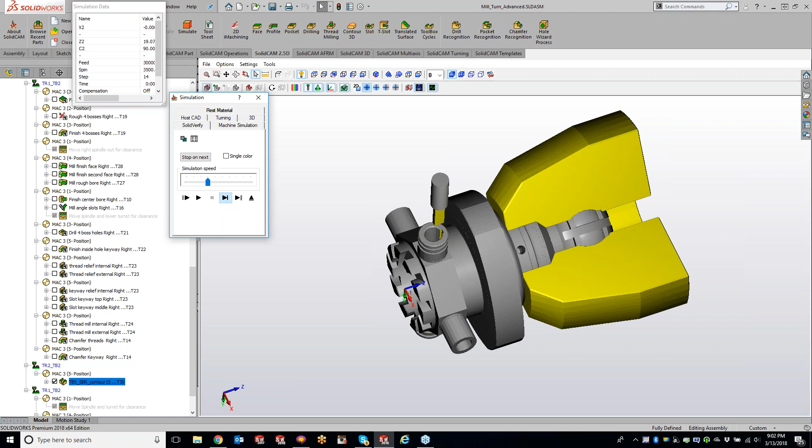Does that kind of help, Ronnie? You're welcome. Okay, so on that one, now obviously what I can do is I can do a save and copy, and all I have to do is switch out my geometry to this one, and then we can do a 4-axis transform. We're running a little late on time here, so I want to show you a couple other things here.

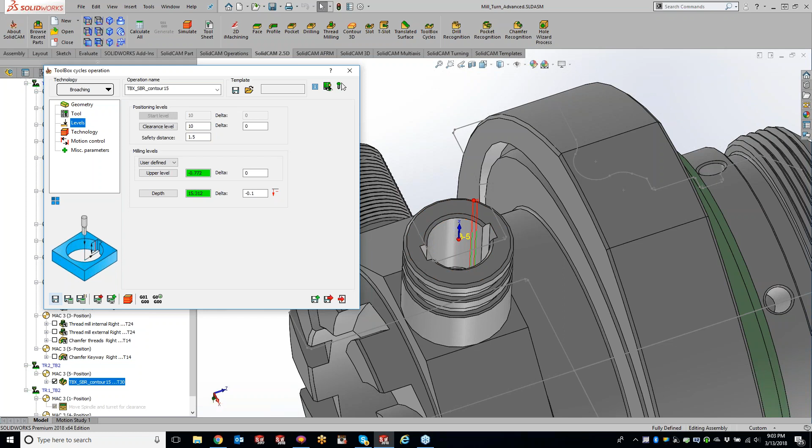Okay, so we got our broaching in there. I didn't want Ronnie to be mad at me, so I had to get that one in there.

Okay, so we did talk about channel synchronization. Now, like I said, on this specific machine it's not set up for it, so what I'm going to kind of do is update it and remove some things. So you can see I have a couple different setups, one is when we're on the right spindle, and then we have one for the left spindle, and a couple other ones. So what I'm going to do is go through and delete these setups real quick.

And delete that setup too.

I know you're never mad, Ronnie. I like to give you a hard time though.

All right, and I know I have setup one up here. So I just want one setup. And that's pretty much how your mill turn machines are always going to be. You only need one setup and that's it. You don't need multiple setups like we did with this part. So now, once this is done being removed, okay. And let me just do edit and in stock. That looks good. Okay.

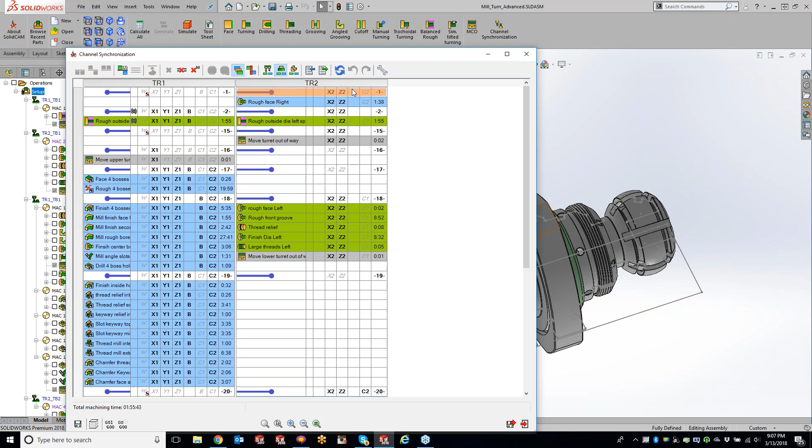And if you guys want a real in-depth on how the channel synchronization works, there's 2 videos on the SolidCAM University channel that will go over that to a T for you guys. So I'm not going to cover too much here just because we're going a little late as is, but it's as easy as just clicking that channel synchronization and everything gets done for you automatically. And just make sure you hit the save button.

Yep. Quick question. You know, we've kept channel sync as an option. Is that machine dependent, or is that more if you want that flexibility or capability in your software? More or less, well, kind of both. It's definitely machine dependent, because if you don't have an upper turret and a lower turret, there's no point. Sure. There's nothing to sync up. So it's just to optimize that toolpath for you guys.

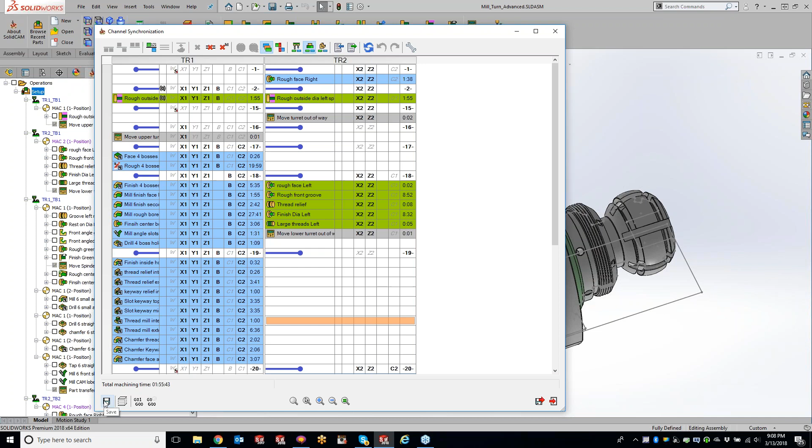So you guys don't have to come through, let me exit out here, and click and drag all this stuff around to try to figure out what it's going to look like after you have 2 things going on right here. So this is going to check the interference, make sure that upper turret, you know, if the spindle's spinning, obviously we can't be doing a milling operation at the same time. So it's going to take out that guesswork for you guys and really make things very easy in that sense. So.

Good, but one of those software options that can pay for itself really quickly. Yes. Correct? Yes. Okay. Absolutely. Cool. Especially if you pile up one of these machines, they're not cheap to fix. Yep. Good deal. Any questions, guys, though?

That kind of wraps up mill turn. Is there anything that I missed with mill turn that you guys wanted to see? We kind of started off with some simpler parts and kind of worked our way up to some crazy looking parts. But let's see, can we see the combine?

Okay, so yeah, I can show you the combine synchronization right now. Since I don't have that machine sim set up for this machine right now, we're not going to see everything correct, just because the solid verify is the only thing that we can base it off of right now. So we can't show a left part and a right part at the exact same time. So the fixtures kind of bounce around. We're going to show crashing.